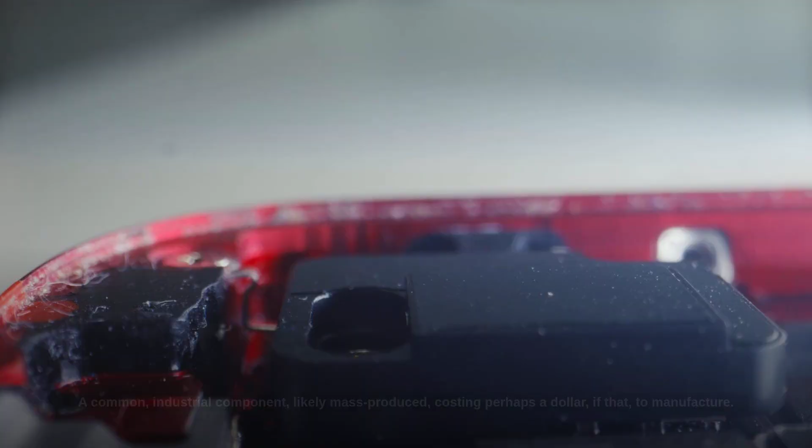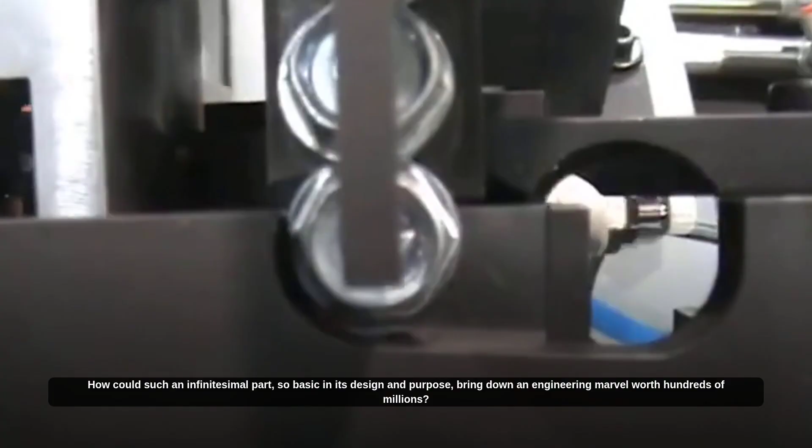The culprit, discovered only after a painstaking, months-long investigation, was a tiny, seemingly insignificant piece of hardware. A single screw. A common, industrial component, likely mass-produced, costing perhaps $1, if that, to manufacture. How could such an infinitesimal part, so basic in its design and purpose, bring down an engineering marvel worth hundreds of millions? It's a paradox that continues to challenge our understanding of complex systems and the crucial role of every detail.

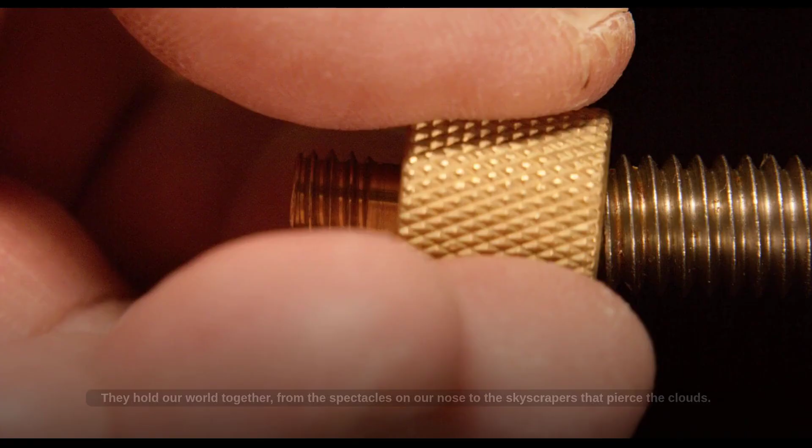Fasteners like screws, bolts, and rivets are the unsung heroes of engineering. They hold our world together, from the spectacles on our nose to the skyscrapers that pierce the clouds. In an aircraft, their importance is magnified exponentially.

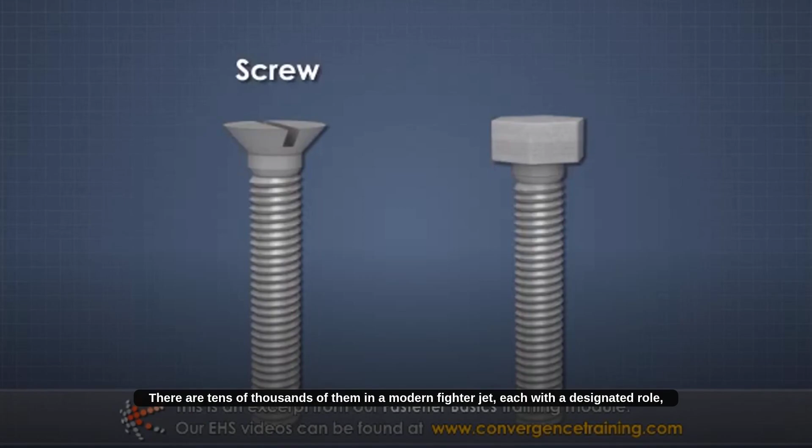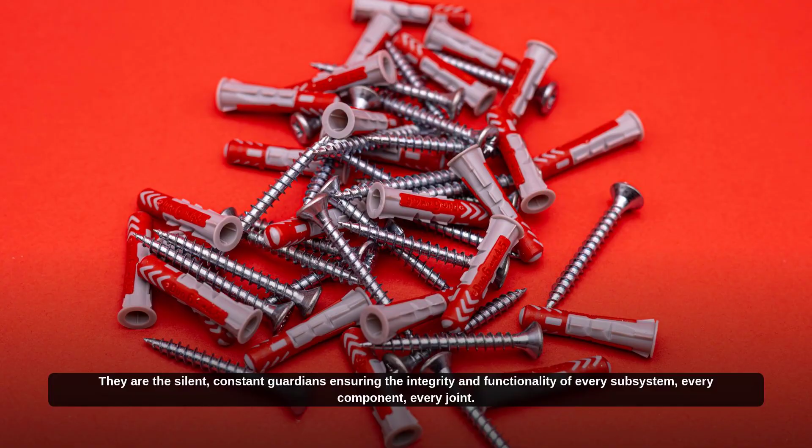Every single screw, bolt, and rivet is specified for a precise application, subjected to specific loads, and designed to withstand particular environmental stresses. There are tens of thousands of them in a modern fighter jet, each with a designated role, from securing a tiny sensor to bearing significant structural loads. They are the silent, constant guardians ensuring the integrity and functionality of every subsystem, every component, every joint.

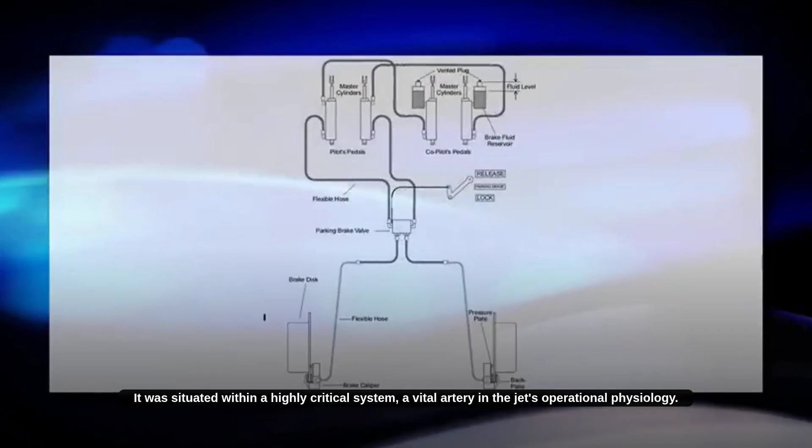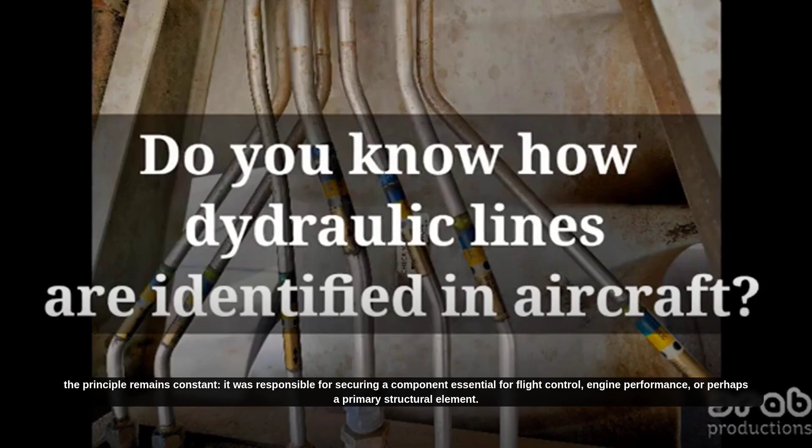This particular screw was not just any fastener. It was situated within a highly critical system, a vital artery in the jet's operational physiology. While the exact system can vary across different incidents, the principle remains constant. It was responsible for securing a component essential for flight control, engine performance, or perhaps a primary structural element.

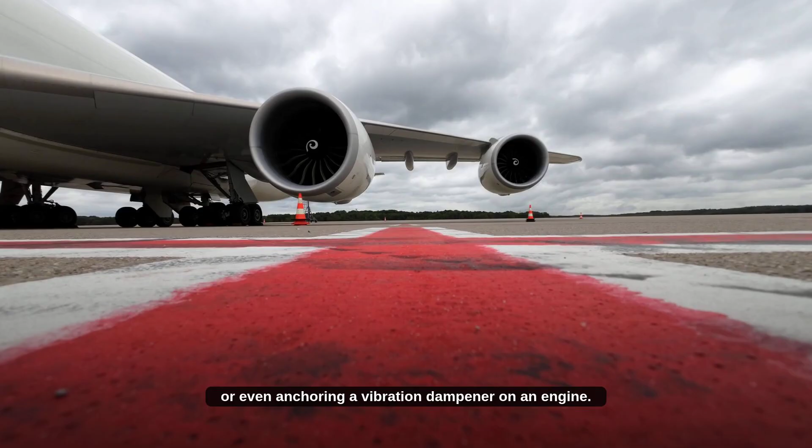Imagine it connecting a hydraulic line vital for rudder movement, or securing a sensor that feeds crucial data to the flight computer, or even anchoring a vibration dampener on an engine. Its position might have seemed innocuous, hidden away in a complex assembly, but its function was absolutely non-negotiable for safe flight.

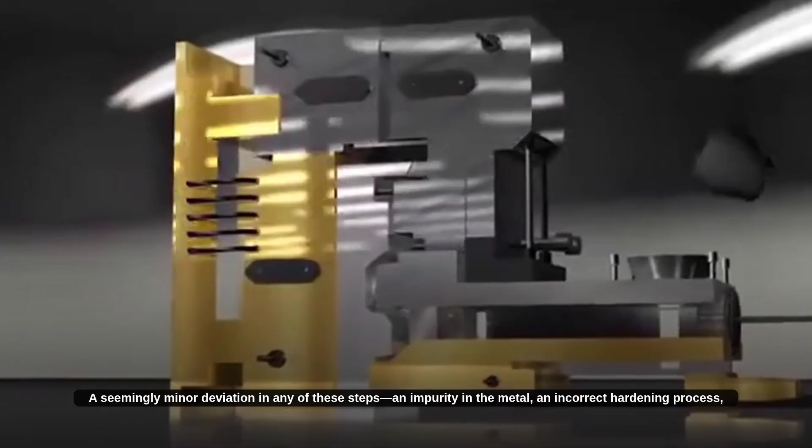Even a simple screw is a product of complex manufacturing and metallurgical science. The type of metal, its heat treatment, the threading process, and protective coatings are all precisely chosen to meet rigorous aerospace standards. A seemingly minor deviation in any of these steps, an impurity in the metal, an incorrect hardening process, or an imperfection in the thread, can compromise its integrity.

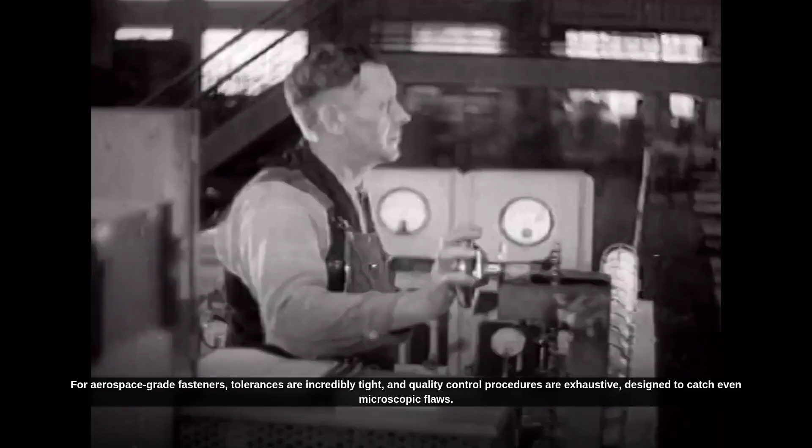For aerospace-grade fasteners, tolerances are incredibly tight, and quality control procedures are exhaustive, designed to catch even microscopic flaws. The assumption is that every single component, no matter its size or apparent simplicity, meets these exacting specifications.

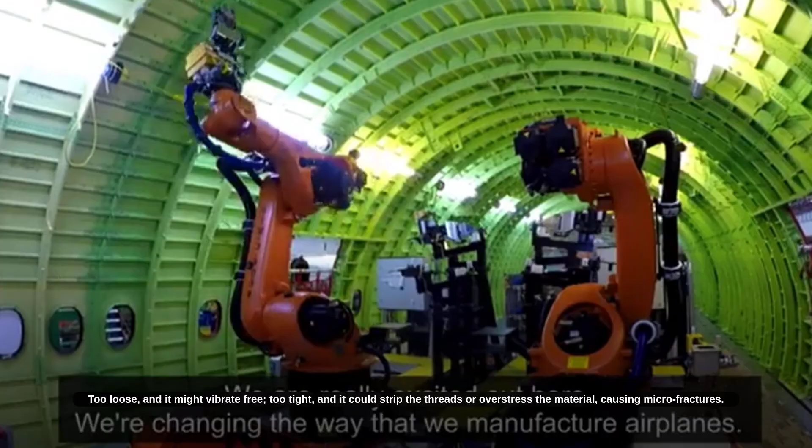Once manufactured, these components are integrated into the aircraft during assembly. This process involves thousands of individual steps, often performed by highly skilled technicians following incredibly detailed instructions. Every screw has a specified torque value, how tightly it must be fastened. Too loose, and it might vibrate free; too tight, and it could strip the threads or overstress the material, causing microfractures.

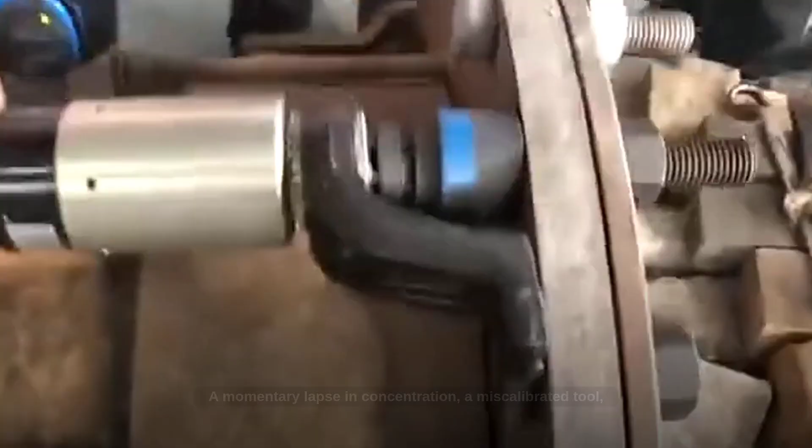In a machine with millions of parts, relying on human hands and calibrated tools, the potential for error, however small, is ever present. A momentary lapse in concentration, a miscalibrated tool, or even the wrong screw from a batch can set a catastrophic chain in motion. Fighter jets operate in an environment of extreme stress.

They endure violent maneuvers, supersonic speeds, and the constant, intense vibrations emanating from powerful jet engines. Over time, these forces take their toll. Even perfectly manufactured and installed components can succumb to fatigue.

Metal fatigues not from a single, overwhelming force, but from repeated cycles of stress and relaxation. Microscopic cracks can form and propagate, growing slowly until the material's structural integrity is compromised. For a critical screw, this means a gradual weakening, a silent countdown until the point of ultimate failure, often undetected until it's too late.

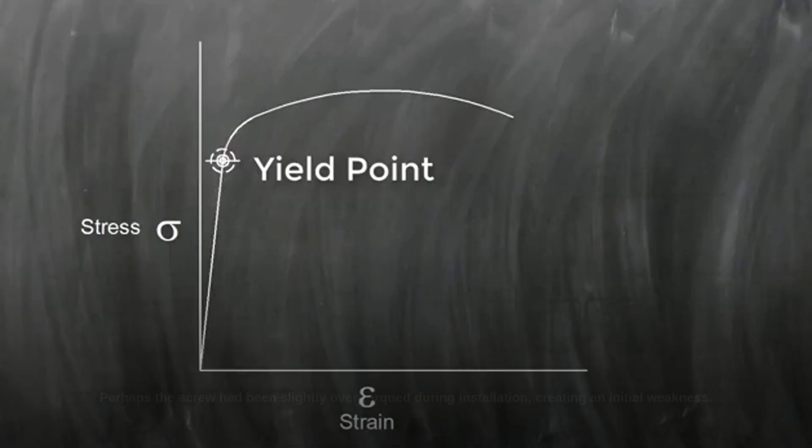On that fateful flight, the confluence of these factors reached its critical peak. Perhaps the screw had been slightly over-torqued during installation, creating an initial weakness. Or maybe it contained an inherent material flaw missed by inspections. Combined with the relentless assault of flight stresses and vibrations, that tiny defect began to propagate.

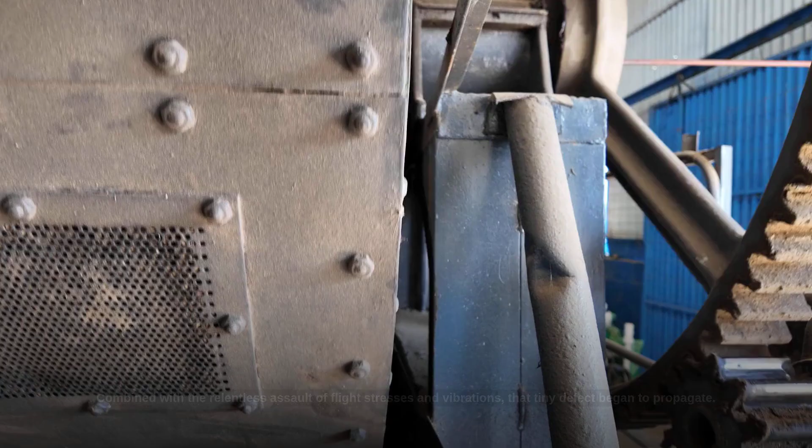In the air, the screw finally gave way. This was not a slow unraveling, but a sudden, decisive fracture. The component it was securing, now unbound, immediately shifted, or detached, or ceased to function as intended. This single point of failure instantly compromised the integrity of its connected system.

The failure of that one screw triggered an immediate and devastating chain reaction. If it secured a flight control surface, the aircraft's ability to maneuver would have been severely hampered or entirely lost. If it was part of an engine mount, the engine's stability could be compromised, leading to thrust imbalance or even detachment. Data from sensors, crucial for the flight computer's operations, could become erratic or cease altogether.

In a modern fighter jet, systems are highly integrated. A failure in one critical area quickly impacts others, creating a cascade that rapidly spirals beyond the pilot's capacity to correct or compensate. The aircraft was no longer responding predictably.

Imagine the scene inside the cockpit. What began as a routine flight quickly devolved into a terrifying struggle for survival. Alarms blared, indicators flashed red, and the controls became unresponsive or unpredictable.

Pilots, trained for every conceivable emergency, would have fought valiantly against the failing machine, attempting to diagnose the problem and implement emergency procedures. But when a primary system, fundamental to flight, is compromised at its core by an unforeseen mechanical breakdown, even the most skilled aviators are helpless. The aircraft, once an extension of their will, became an uncontrollable, heavy mass, accelerating towards the unforgiving ground.

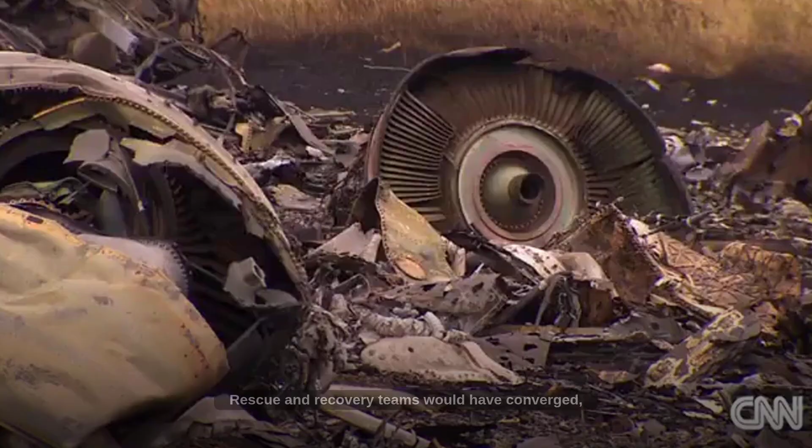Rescue and recovery teams would have converged, not only to search for survivors but also to secure the site and begin the arduous process of piecing together what happened. Every fragment, every scorched piece of metal, every bit of debris becomes a potential clue in the grim puzzle of understanding the final moments of the aircraft.

The investigation that followed was a monumental task of forensic engineering. Teams of experts, from metallurgists to flight control specialists, converged on the crash site. Their mission: to meticulously collect every piece of wreckage, often down to the smallest shard, and reconstruct the aircraft to understand the sequence of events.

The black boxes, the flight data recorder and cockpit voice recorder, would provide crucial insights into the aircraft's performance parameters and the pilot's final communications. But the physical evidence, the broken metal, tells an even deeper story, revealing the precise point of initiation for the catastrophic chain of failures.

After weeks, perhaps months, of painstaking reconstruction and analysis, the investigators honed in on the specific area of failure. And there it was, a fracture, clean and sharp, on a small, unassuming screw. Its remnants, pulled from the twisted wreckage, told a clear story under the microscope.

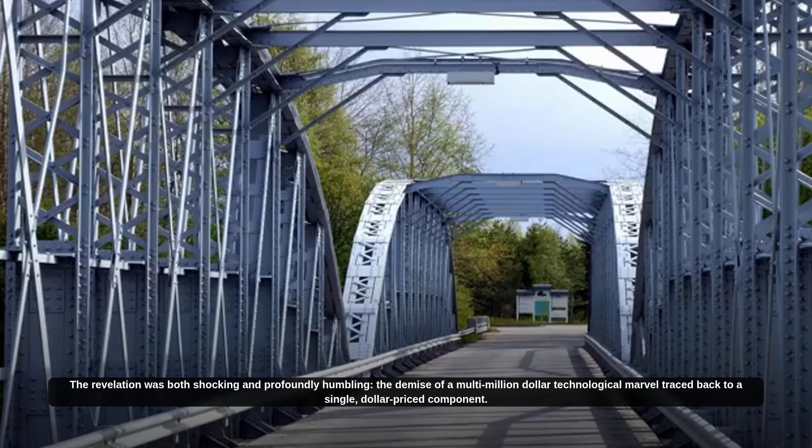This wasn't corrosion, nor external damage. It was a failure from within, a fatigue fracture or a material defect amplified by stress. The revelation was both shocking and profoundly humbling, the demise of a multi-million-dollar technological marvel traced back to a single, dollar-priced component. The irony was almost unbearable for the engineers and designers involved.

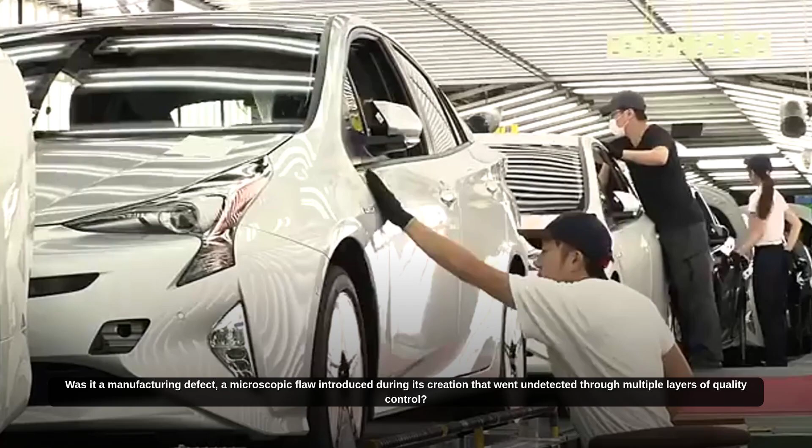The question then shifted from what to why. Was it a manufacturing defect, a microscopic flaw introduced during its creation that went undetected through multiple layers of quality control? Was it an installation error, an improper torque applied by a technician, stressing the material beyond its limits from day one?

Or was it a design oversight, where the stress calculations for that specific point were underestimated, leading to premature fatigue? These are the brutal questions that must be answered to prevent recurrence. Every detail of the screw's life cycle, from its raw material to its final installation, was scrutinized under intense pressure.

The loss of the fighter jet itself, valued at $300 million, was just the beginning of the financial fallout. The investigation cost millions more, consuming countless hours of highly skilled labor. There were potential costs associated with pilot loss, though in many such incidents, pilots might eject.

More broadly, the strategic impact on military readiness, the delay in future procurements, and the potential for a blow to national prestige all add to the ledger. This single screw's failure triggered a cascade of expenses and implications far exceeding the initial aircraft's value, underscoring that the cost of a cheap part can be astronomical.

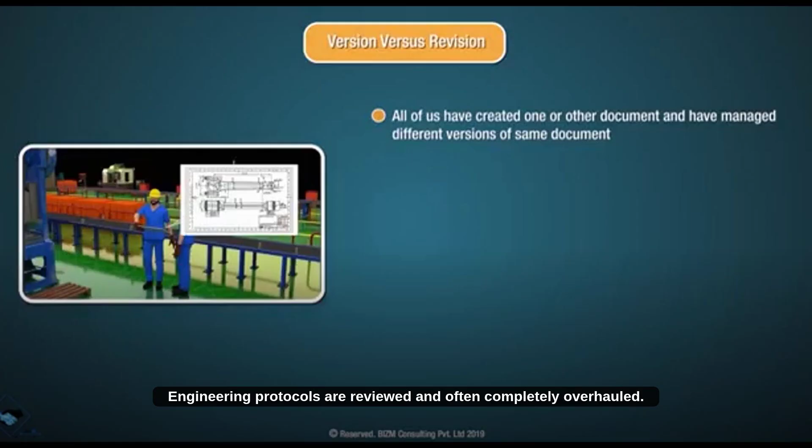From such a devastating failure, profound lessons are invariably learned. Engineering protocols are reviewed and often completely overhauled. Quality control measures are tightened, sometimes to an almost obsessive degree. Training for technicians and inspectors is enhanced, emphasizing the criticality of every single component, no matter how small.

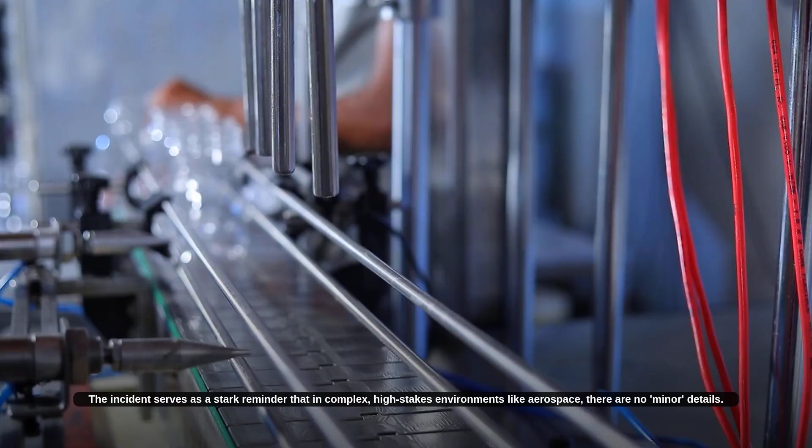The incident serves as a stark reminder that in complex, high-stakes environments like aerospace, there are no minor details. Every component, every procedure, every human action contributes to the overall safety and reliability of the system. Complacency, even in the smallest forms, can have truly catastrophic consequences.

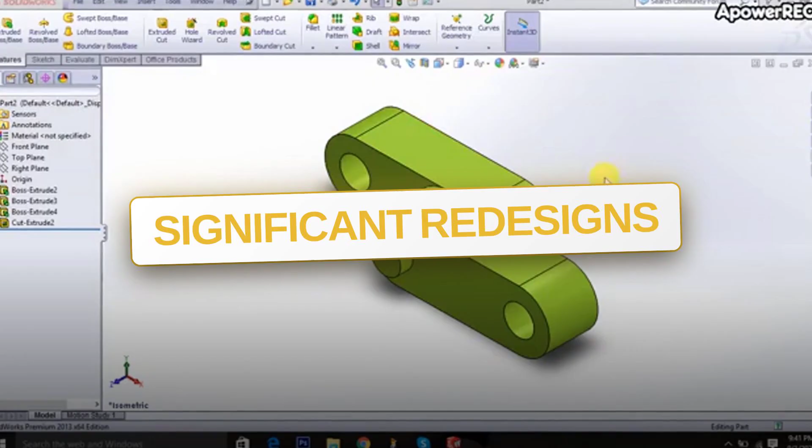Following such an event, it's not uncommon for the affected part or even the entire subsystem to undergo significant redesign. Engineers might opt for a different material, a more robust fastening mechanism, or incorporate redundant systems where possible. If the failure was due to stress concentration, the geometry of surrounding parts might be altered.

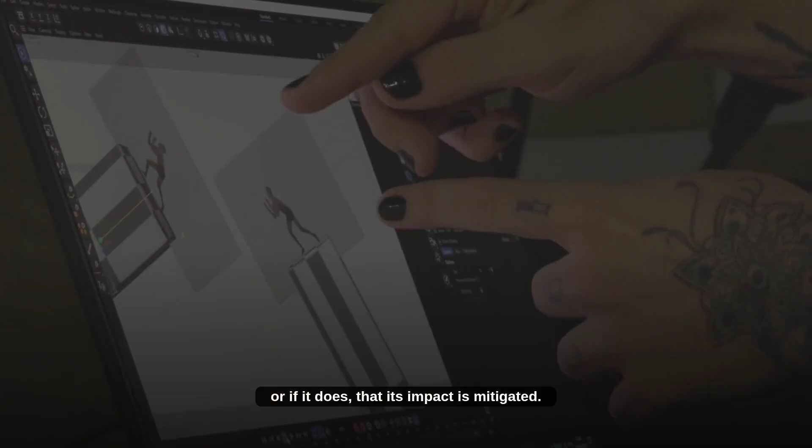The aim is not just to fix the immediate problem but to ensure that such a failure mode cannot occur again, or if it does, that its impact is mitigated. The $1 screw becomes a catalyst for multi-million-dollar redesigns, reinforcing the principle that prevention is always vastly cheaper than cure.

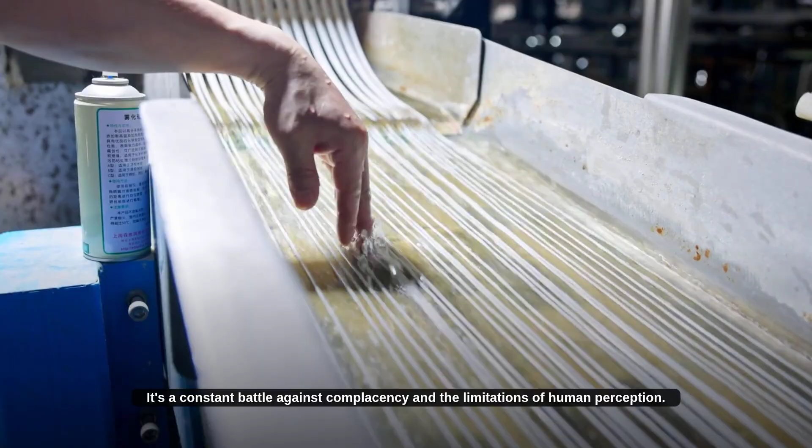Beyond metallurgy and mechanics, this story highlights the persistent human element in engineering. Despite the advanced tools, sophisticated software, and stringent processes, humans design, build, inspect, and maintain these machines. Human error, whether a miscalculation in design, a slip in manufacturing, or an oversight during maintenance, remains a critical factor. It's a constant battle against complacency and the limitations of human perception.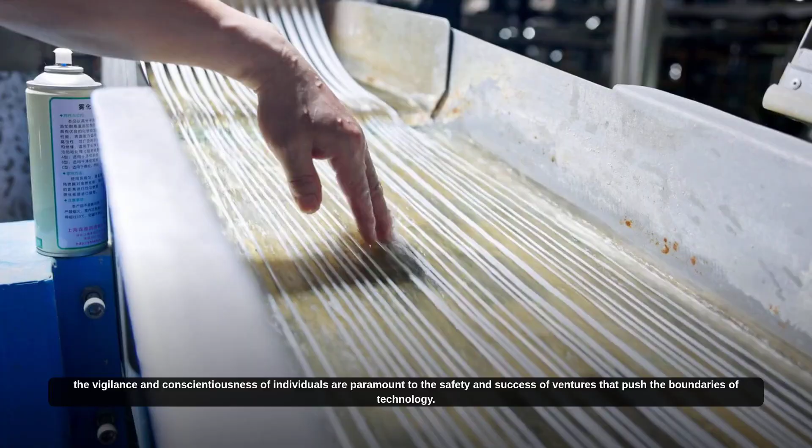The incident is a poignant reminder that even in an age of automation, the vigilance and conscientiousness of individuals are paramount to the safety and success of ventures that push the boundaries of technology.

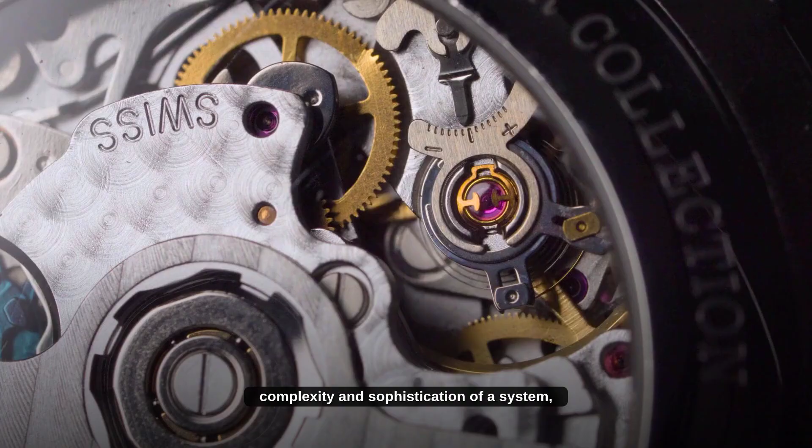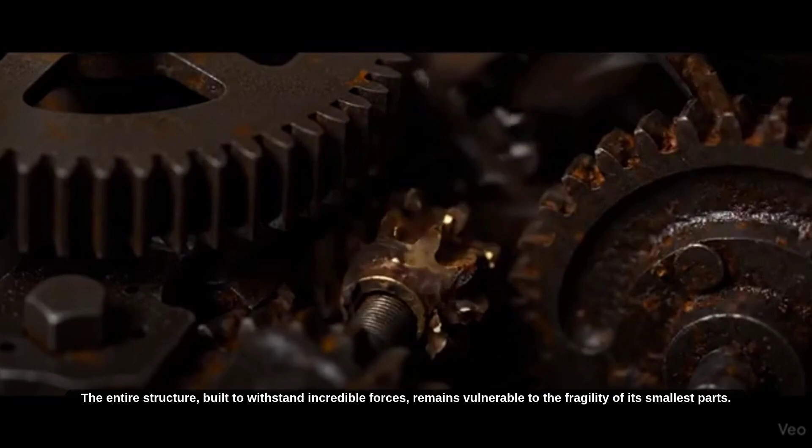This saga of the $1 screw and the $300 million fighter jet underscores a fundamental paradox of modern engineering: the greater the complexity and sophistication of a system, the more potential points of failure it may contain. And often, these critical points reside in the most unexpected, seemingly trivial components. The entire structure, built to withstand incredible forces, remains vulnerable to the fragility of its smallest parts.

It's a delicate balance, a constant dance between innovation and reliability, where the pursuit of perfection is an endless, unforgiving journey, illuminated by the shadows of past failures.

For every catastrophic failure that captures headlines, there are untold millions of successful flights, safe operations, and resilient systems. These are maintained by an army of unsung heroes, the engineers, technicians, quality inspectors, and maintainers who dedicate their careers to preventing precisely such incidents.

They are the ones who learn from these mistakes, tirelessly refine processes, and obsess over details to ensure that the wonders of modern technology continue to serve us safely and effectively. The memory of failures like this one serves as a perpetual motivator, a grim reminder of the stakes involved, driving them towards an impossible, yet essential, goal of zero defects.

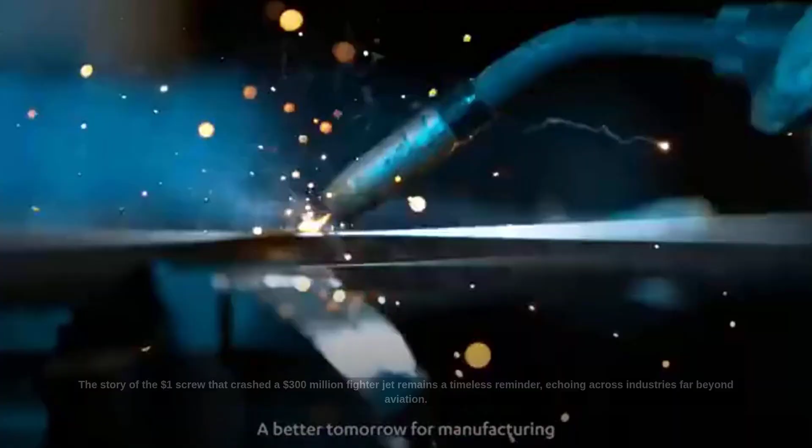The story of the $1 screw that crashed a $300 million fighter jet remains a timeless reminder, echoing across industries far beyond aviation. It's a powerful parable for anyone involved in design, manufacturing, or operations where precision and reliability are paramount. From medical devices to infrastructure, from software development to space exploration, the principle holds true: the integrity of the whole is only as strong as the integrity of its weakest part.

It urges us to question assumptions, scrutinize the mundane, and never underestimate the profound impact of the seemingly insignificant. Because sometimes, the smallest component holds the power to unravel everything.